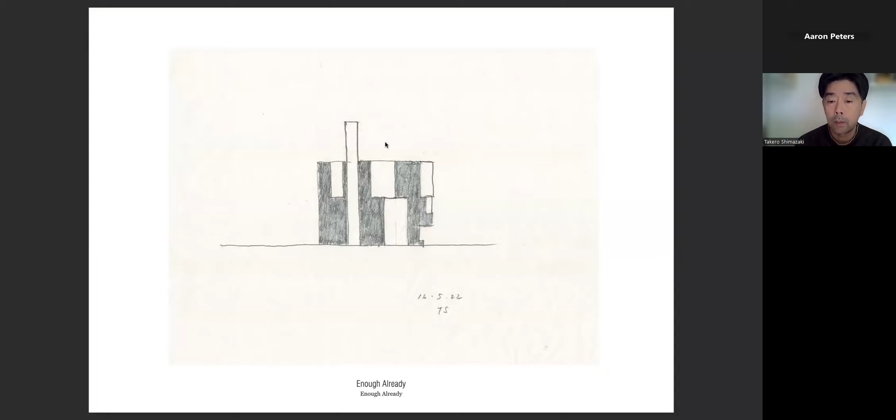It's really about a search for architecture in the times that we live in. We've gone through a very varying, ever-changing economical and political background since 1996 when we started our practice. I remember the harsh experience of the Lehman shock in 2008, and rapid climate change since. With all this background, I think we're really focused on what kind of architecture we can do working with existing things as much as possible.

So I've framed this talk. First I'll go through the topics that I think about as intro. These are based on brief titles for my diploma students at London Met, where I've been teaching since 2016. These are the topics that we've dealt with over the last 10 years or so with my students, and I thought I would frame our own work at TSA under these headings.

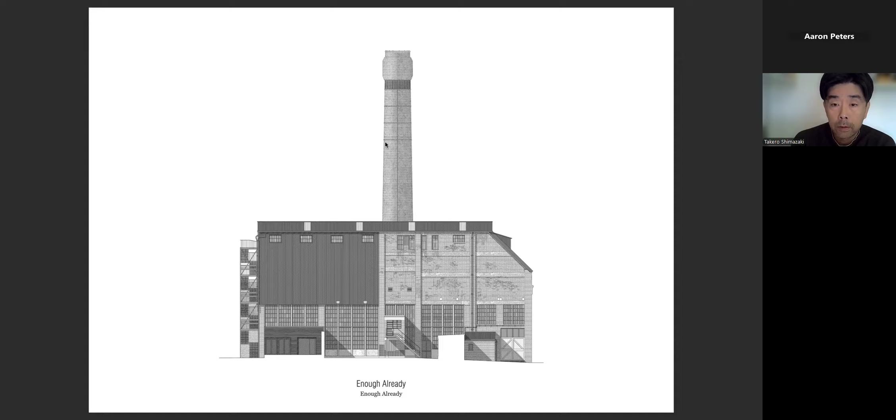So, 'Enough Already' really is about observation. It's about talking about observing as already a design process or design development, by looking very carefully at things that you already have. You're kind of designing half of the project already. The other thing is that with the title 'Enough Already,' it's not to say that I'm angry or fed up. It's more that we do have enough building stock and things that we can already work with. It's kind of saying that the glass is half full.

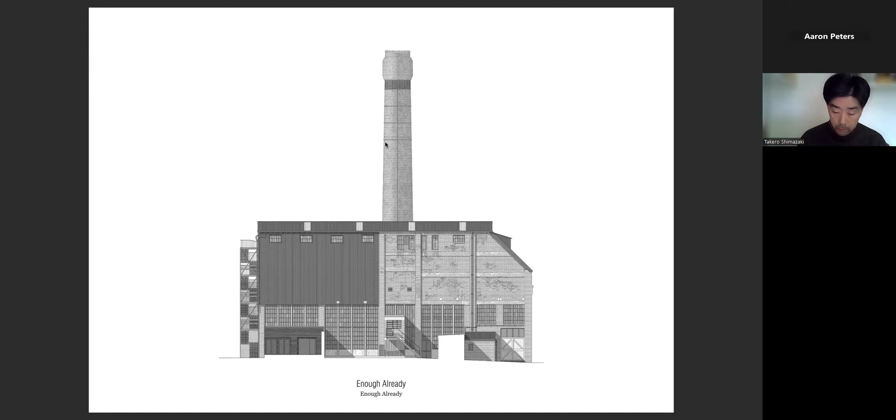I like to believe that we live in a world of abundance. We've worked, like many practices since 1996, on small projects, refurbishments, extensions, and this has already always been like that. We've always worked with existing things—it's not just a recent thing.

So these are topics that we've been thinking about, and I'll discuss them in more detail. But 'formal correction' was something that came from a brief that we set up in 2016 with my core tutor at the time, Summer Islam of Material Cultures. We began by looking at Palladio—I wanted to go back in history and look at what these architects were doing. We focused on the idea that this Basilica Palladiana was, in essence, a reuse.

It's a project where Palladio made this new loggia around the former Gothic building. You can see in these diagrams that the new loggia, in the perimeter, the column rhythm actually works ever so slightly to adapt to the unevenness of the existing situation.

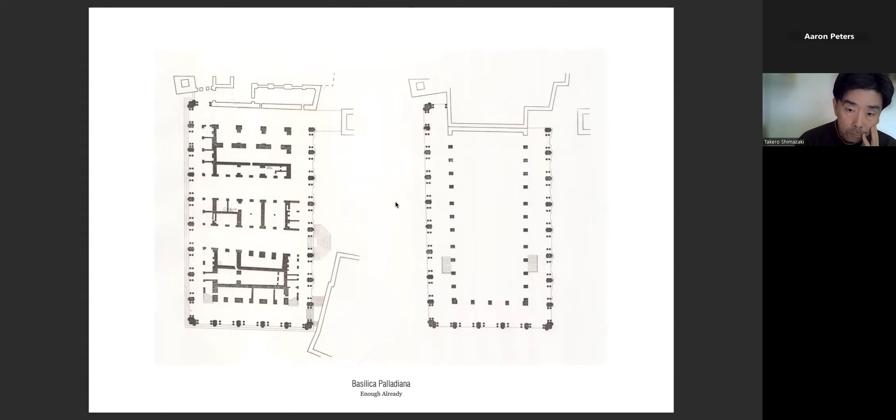You can see that this original building is slightly not perfectly symmetrical nor proportioned, and Palladio has this amazing skill to adjust that—to actually formally correct it—so that the end product has more of an order. We found that very, very interesting as a process.

We asked our students to look at Palladio's idealized plans and drawings from his Quattro Libri book. Then we went to Vicenza and surveyed the buildings that were actually built, and overlapped those two drawings just to see what changes occurred from the idealized diagrams and drawings to the reality. We found a really interesting idea in practice as well.

This is a project I won't talk about today, but it's an ordinary suburban house in Surrey that we, shall we say, formally corrected by adding this loggia when the client asked us to extend into the garden. These are the sort of discrepancies that occur with the existing openings and the new opening, which was something very interesting for me.

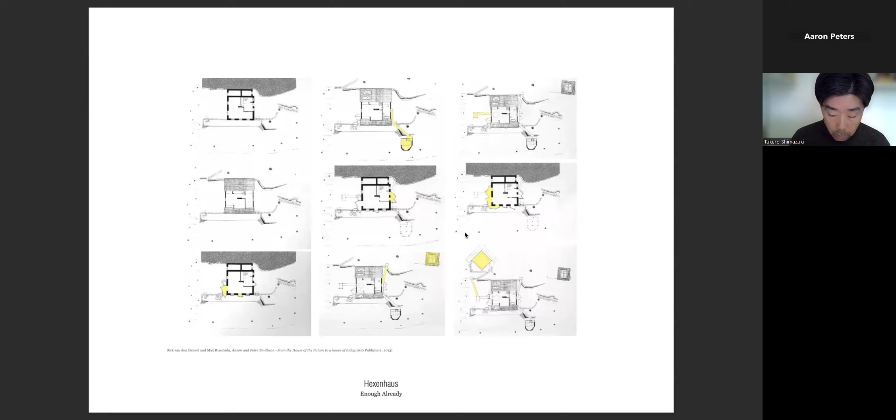When I started teaching at London Met, I was surrounded by some amazing architects like Peter St. John, Tony Fretton, and I often noticed that they referred to other buildings and other precedents.

For me, this idea of translation really began from my time at Alison and Peter Smithson's office, round about 2000. After I set up my own practice, I had an opportunity to work for Peter two days a week, helping him with a project called Hexenhaus, one of the Smithson's last projects, where they developed this ordinary house in Germany and added a porch, a bridge, a wine drinking room, etc. These extended porches spanned about 25 years. I don't think the project's still finished, but this idea of renewing with the client over a long period of time was a very big influence on our practice.

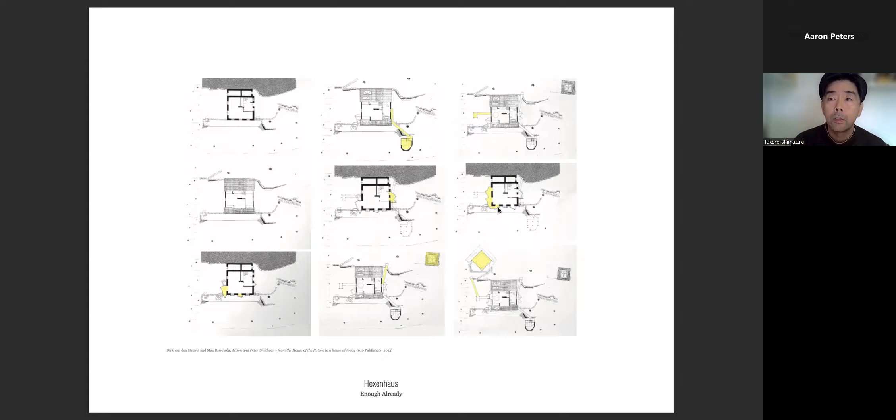That you can do quite little, but accumulate ideas over years. At a more personal level—this is the client's business card—the way the client at Hexenhaus worked has influenced what we do in the practice daily, and influenced things like our Christmas cards. This is a card received from Axel with Smithson's drawing of Hexenhaus, the business card, and both Smithson's and Axel's cats appearing in the cards.

So, Enough Already. I'm interested in the idea of abundance and the fact that we already have a lot of existing richness. We ask students every year to start with surveys, and we draw the existing through observation drawings. We really look at what's there already. That moment in time is very important.

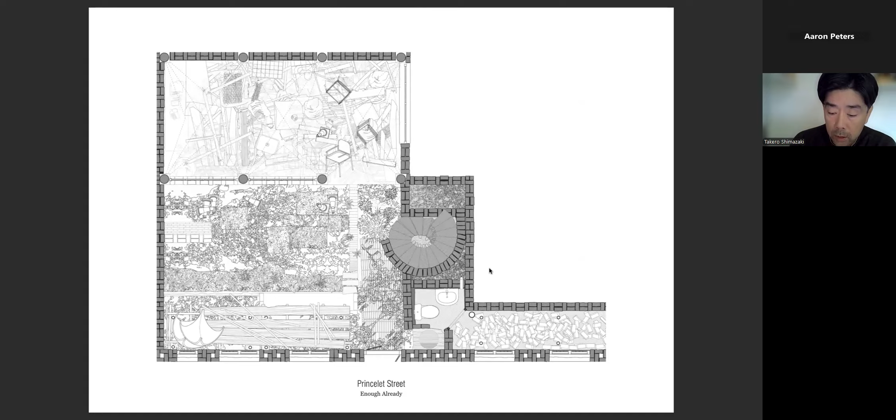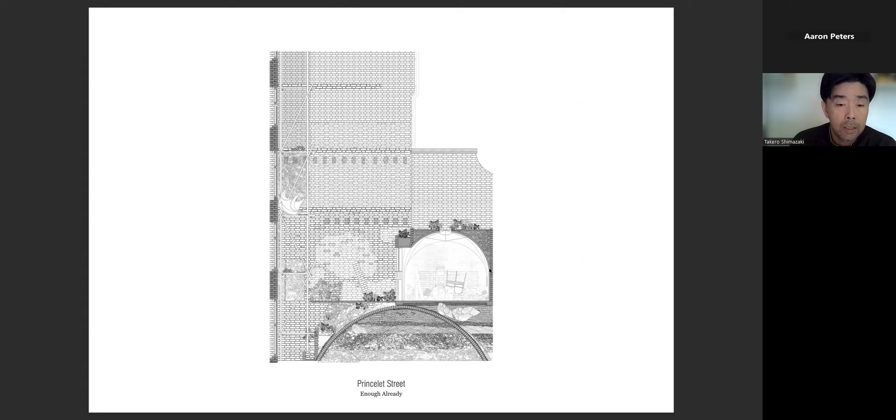Lina Bo Bardi called it the historical present. Everything that exists in front of you, whether it's historical or contemporary, I think it's all the same—it exists presently. So we take that seriously and we record what's present in front of us. We think that everything is, in a way, from the same era.

This was an exhibition that we did that year with my diploma unit in the Truman's Brewery area, Brick Lane, with Assemble, showcasing students' work.

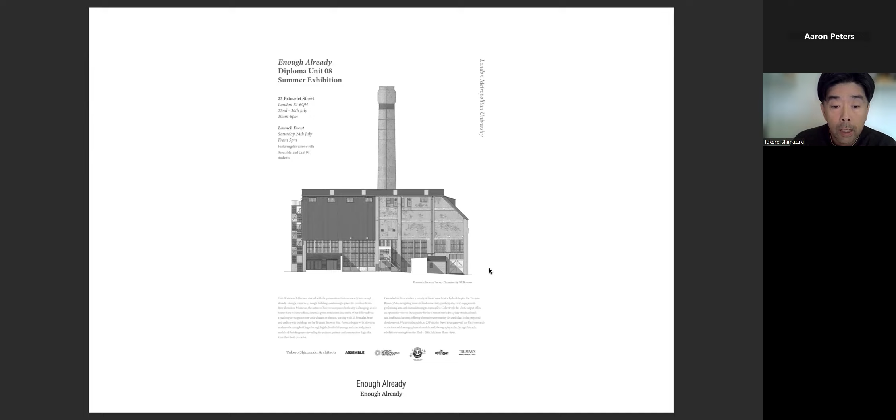This is another year, but I did some writing about students' model making for Stoa magazine from Naples. This was work by the students recording every aspect of fragments of existing buildings in Stoke-on-Trent.

This notion of making existing things through models became a habit in our unit. This is Ollie Brenner in the year of Enough Already, making this existing model on the left, and how it became part of his proposal. But this is already, to me, architecture—the making of the existing is already a proposal.

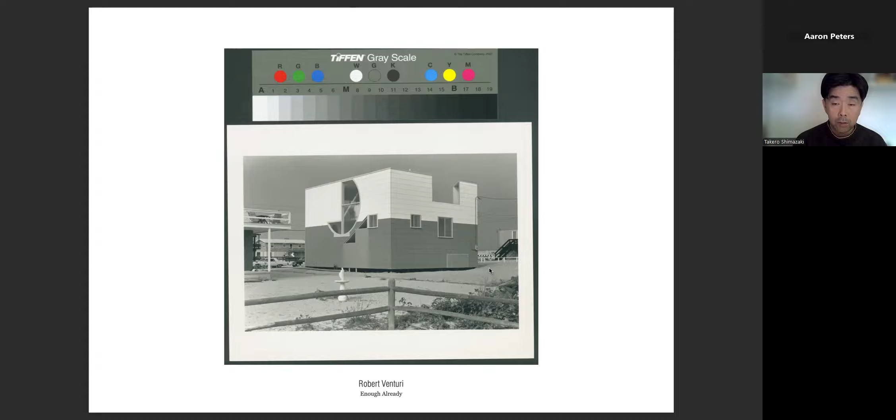Lightness and weight is another important topic for us, and we studied it through Robert Venturi's book, Complexity and Contradiction, looking at this idea of how you can make something quite weighty out of light materials. So our interest was about this kind of materiality.

Again, when we went to visit Palladio's work, we noticed this kind of timber construction appearing through decay, and this aim of making something quite light appear quite heavy with stucco render to look like stone—that was already at play in Palladio's time.

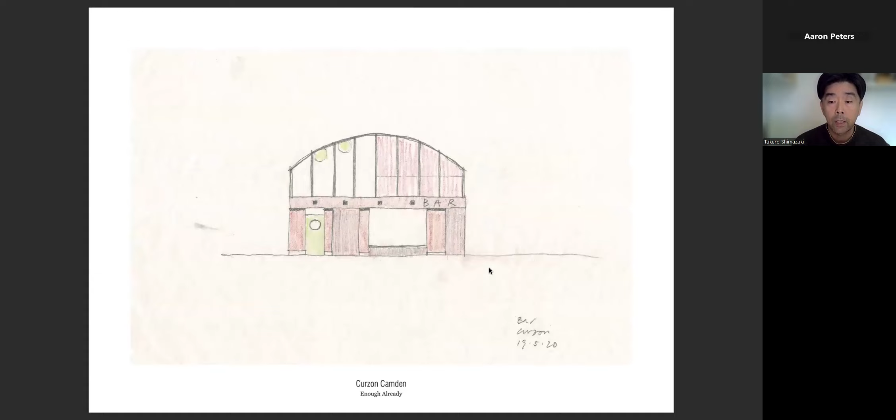I very much enjoyed this idea when thinking about our own projects, often with a very tight budget. I'll show you later, but this is about that notion in our Curzon Camden project, which is essentially just render and lightweight steel construction.

Yohaku and Ma was another brief, really about the space between. It's about this idea that in times of scarcity, lack of resource, low budget projects—where can we make architecture? I think architecture can exist in how we space things, how we make distances between things. Those things can create tension and, in a way, beauty.

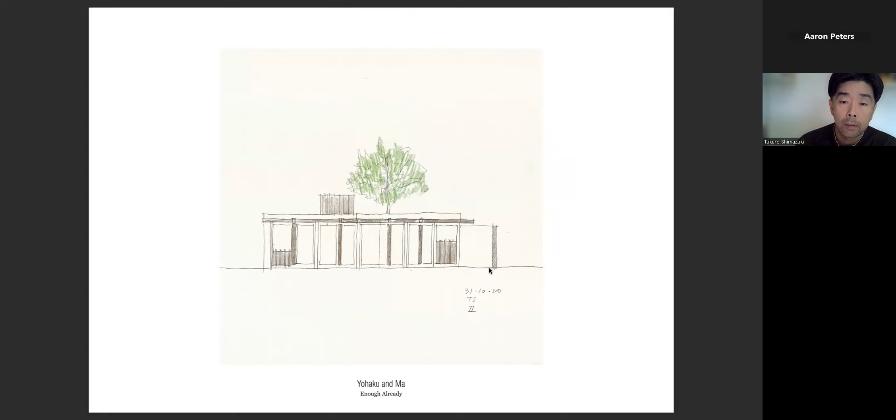This comes from the idea of Ma in Japanese traditional architecture—that a lot of Japanese architecture comes from this idea of spacing and distancing of columns, and tatami mats as living spaces. These ideas were utilized in Niwa House, which I'll show you later, but the idea that column spacing and user plan layout spacing became very key.

We architects talk about tolerance all the time, about when materials come to meet, but maybe there's not much discussion about how architects can be tolerant to existing situations and work with existing things. Working with existing things means you have to be really tolerant, you have to really work with what's already there, change your stance, and be really accommodating.

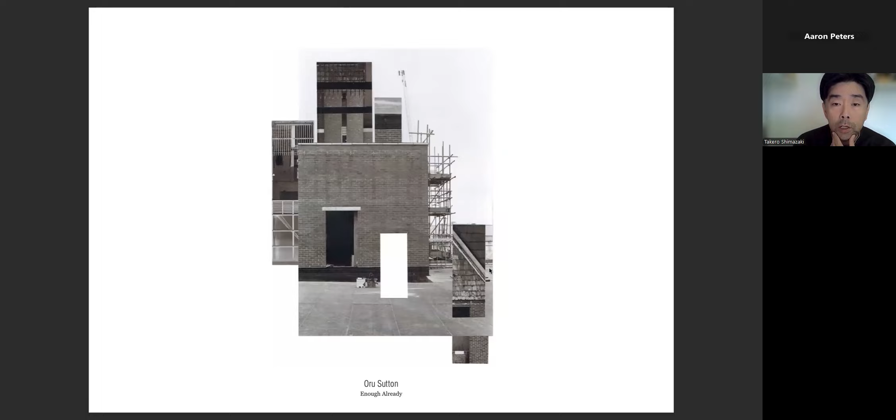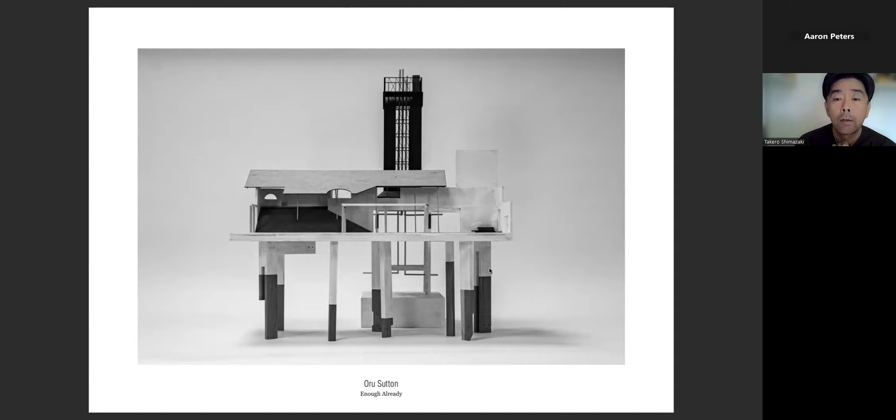So these are some students' work on collaging, trying to see solutions in the existing, working with materials as found, and from skip, in a way. This is a project by Ryan Spear in our unit, working with as-found materials to make this model for a community center in Sutton.

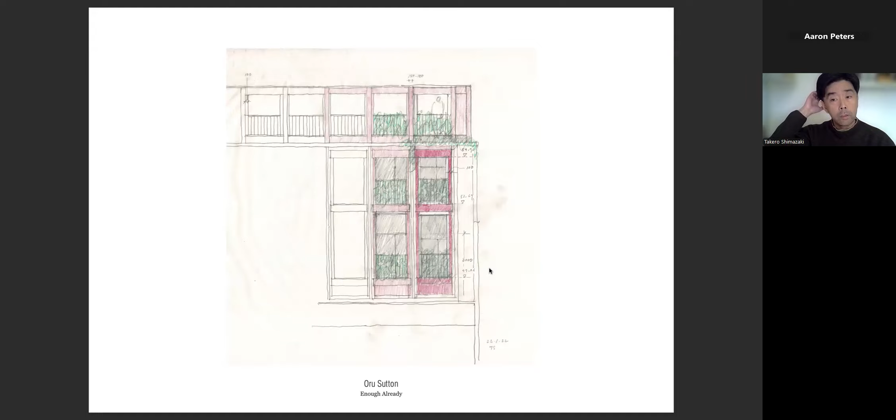And I kind of work like that all the time, where these insertions of a new facade onto an existing facade are really about this struggle about tolerance.

Finally, we're working this year with my group of students on this notion of what goes up, what is permanent, what is impermanent. We're asking our students: nothing is really permanent, everything is impermanent. But if we start from that notion, how do you think about architecture? How do you think about what you build, about the reuse of your own work 50 or 100 years later? What makes that change the way you think about maintenance?

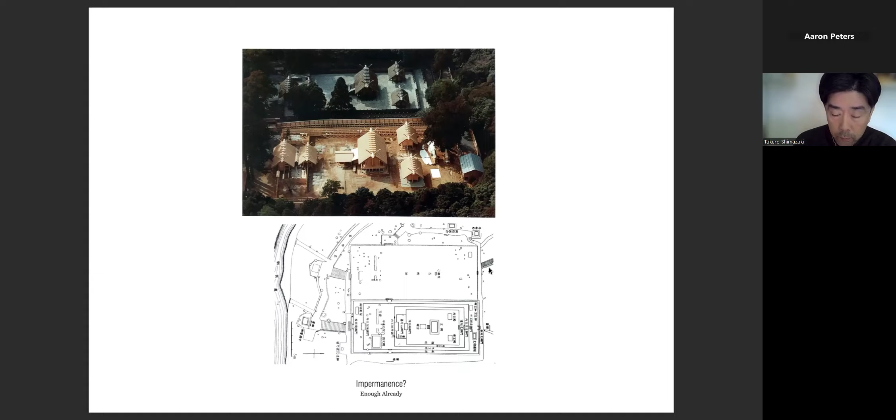We're giving them examples of what was perceived as permanence, or different ways of permanence. The Ise Shrine in Japan is thought of as permanent in a different notion, maintained by rebuilding every 20 years. But is that really sustainable? The shrine is obviously very special, with surrounding forestry, etc. Those are questions we're asking our students, and I think we think about that quite seriously in our practice too.

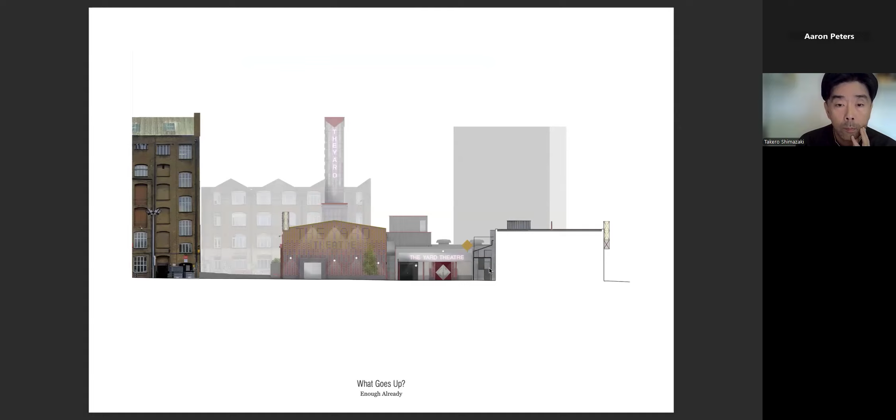I won't try to explain or describe the projects in the time we have, but I wanted to show, almost like slides, those notions I just talked about in my introduction, how they may have materialized or been discussed in these six projects. Five are reuse projects, one is a new project, but I'd categorize them all as working with existing things.

So Leicester Print Workshop is a project from 2016. The Leicester Print Workshop art facilities inherited this glass warehouse in the middle of the arts quarter from the council. We started by working with this existing building and asking what can we do with it. The budget was only 450,000 pounds, so a very, very tight budget.

It became about how do we really maximize these existing features and character. By stripping a little bit, we started to get deeper into the character of the existing, which we thought was really fundamental to the future of this building.

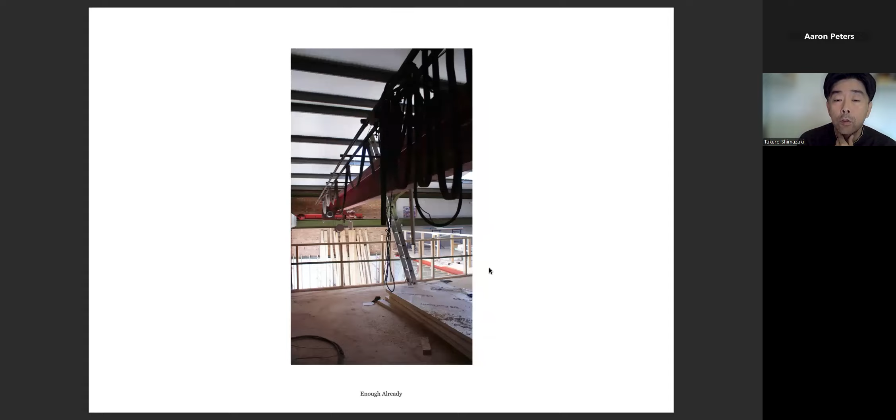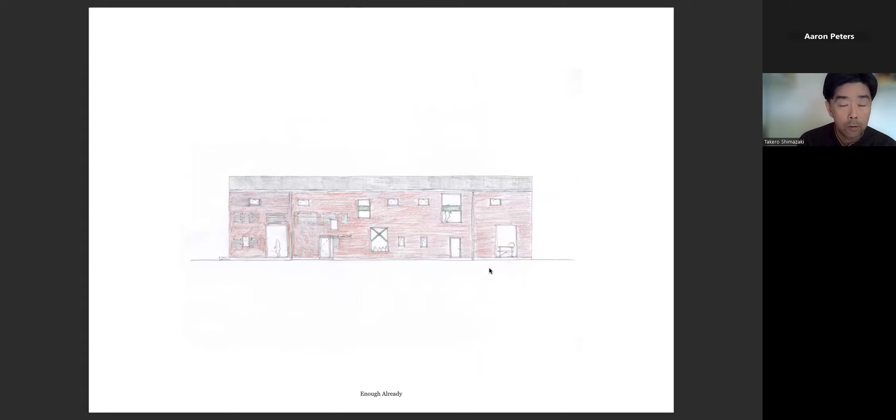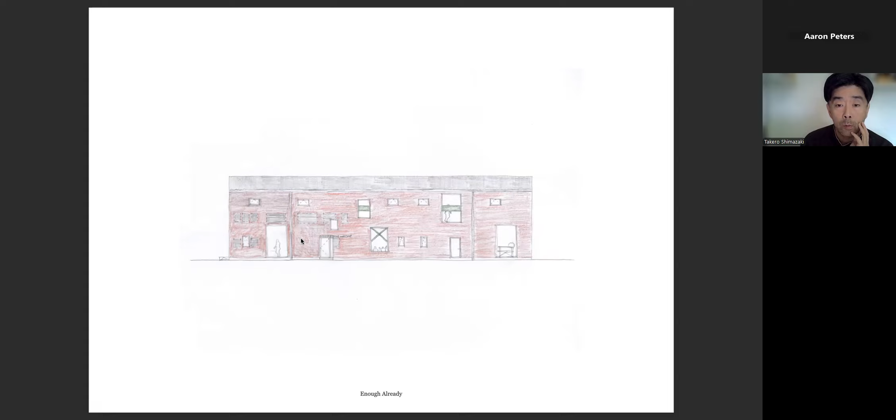We decided that everything we add would be just white, so you're able to really have these glimpses of the existing from the cityscape as well. We brought in a new order, a new playfulness to the facade, reusing the brickwork to close off some of the openings from the existing. So if we make an opening, we use the same brick to close off some of the openings, and so on.

These are sketches from early on, which we developed into the final scheme. And the plans are very simple.

You can see all these partitions are new, dividing the co-working studio space from the back-of-house dark rooms, washrooms, etc., with the educational facility in the middle, and a small gallery space to the front of house. This is a really admirable institution.

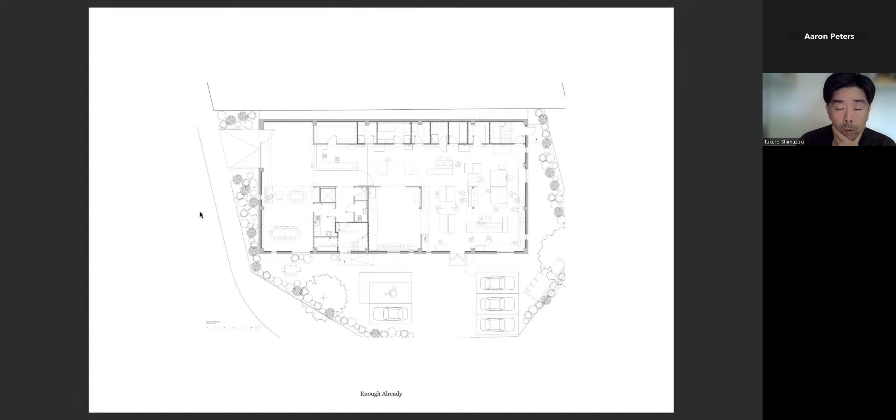It's really looked after by the artists themselves, and we were really fortunate to work with them. The client body included Soraya Smithson, who was a member of the board — the daughter of architects Alison and Peter.

So we really enjoyed the project, creating this almost like a reused new body in the city, in this quarter of former warehouses. We quite enjoy the fact that it's acknowledging the context, but it's clearly slightly different. And we enjoyed that juxtaposition, but it is really a very frugal, humble project of reuse with limited budget.

What we really enjoyed is how the artists keep on developing the site. The garden is now fully developed outside by them, and they added a bookstore inside, etc. This is a gallery space. Once the artists started to occupy it, the space has really become alive.

And this kind of relationship with existing surroundings and the spaces inside - really how the former warehouse is always visible and always present, cutting through these partition spaces, with the former beams and structural cranes, etc. So you kind of really live with the historical present.

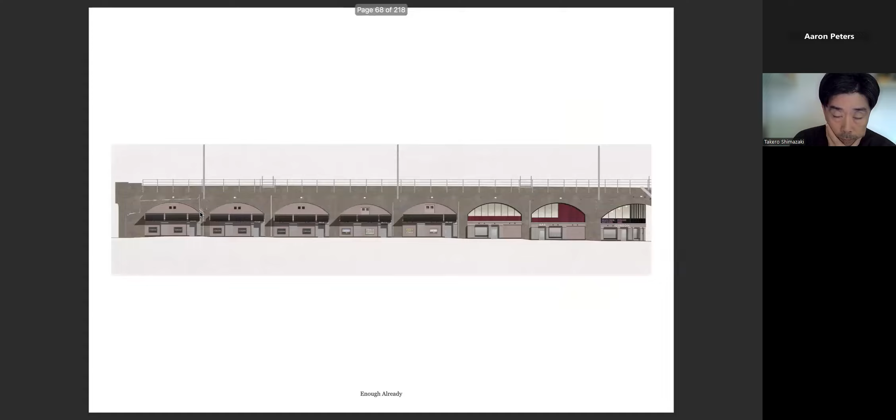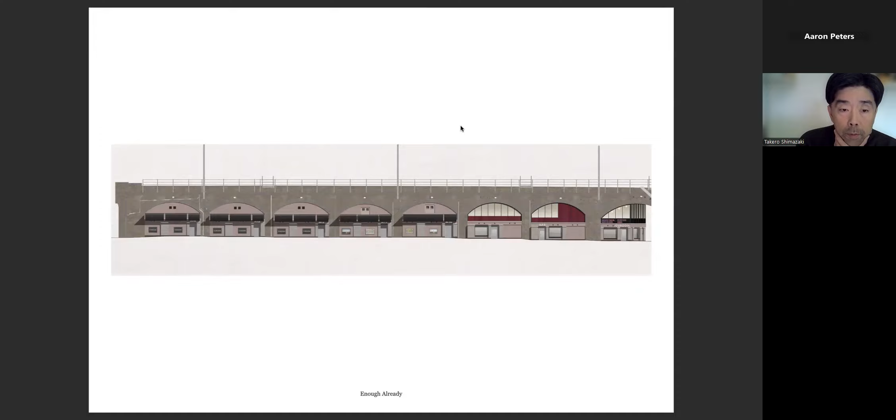Curzon Camden is another project which is about working underneath the existing railway viaduct. The developers had already started this development, so a lot of the glazing and curtain walling was part of the existing structure. We worked with the master plan by the developer architects, but then remodeled all the other infills. It's essentially a new cinema for Curzon Cinema with five very small, intimate screens, a bar space, and a little coffee shop.

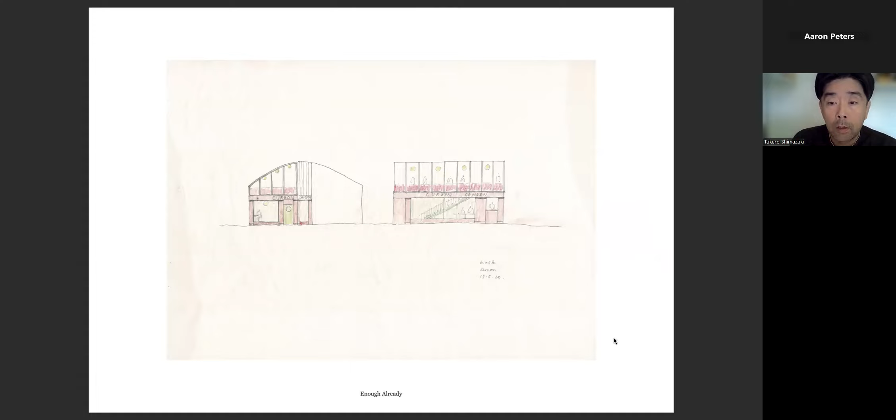We enjoyed thinking about what kind of architectural ideas are possible with, again, quite a limited budget with a light touch. So this idea of lightness and weight became fundamental in our approach.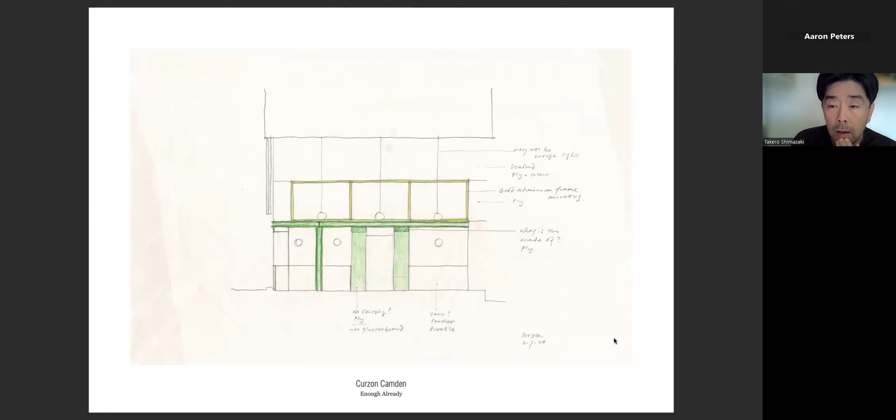I won't go into too much detail, but the green is what we've added, and we worked with the existing black background. We utilize as much as possible existing elements, even the new insertions by the developer, to really think about what kind of atmosphere we can recreate.

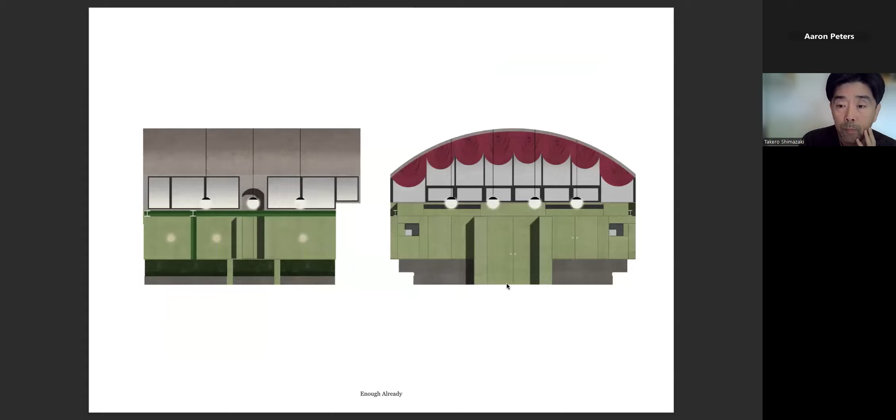So everything is like a mix of render. These vertical columns are just render columns, not even touching the ground. And this is just really reusing the existing curtain walling that the developer left there.

So it's really looking at opportunities for architectural interventions, I suppose, in every little square inch, maximizing these existing things into a new language.

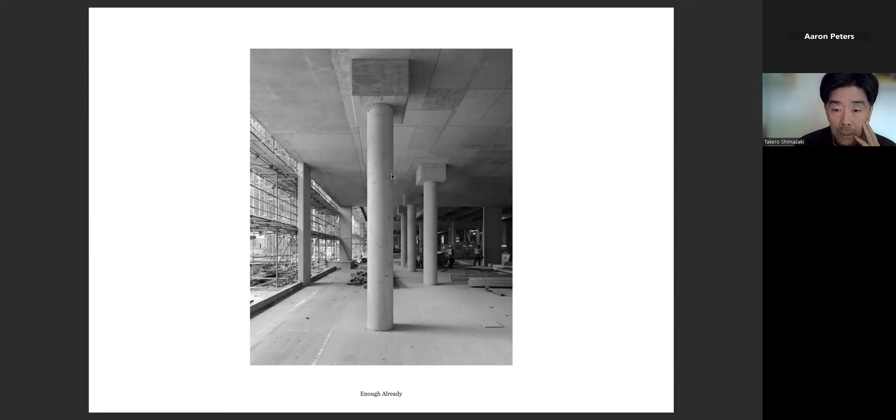And we had to work with as-found conditions in this new development - in the sense that we had to work with what the developers were proposing for the housing units above, and these are the structures holding that up to create this new dance school, ballet school.

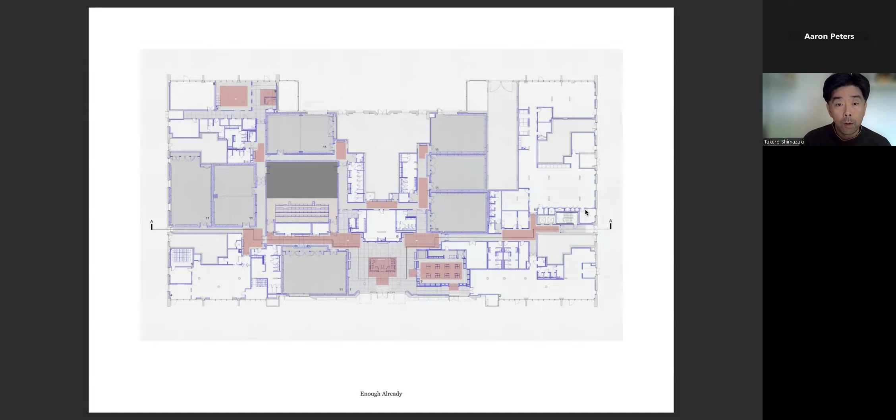This is the entrance, and then we have seven dance studios, one big performance space, library space, cafe space, shop space, office, lecture rooms, etc. So it's a big city kind of inside a new developed city.

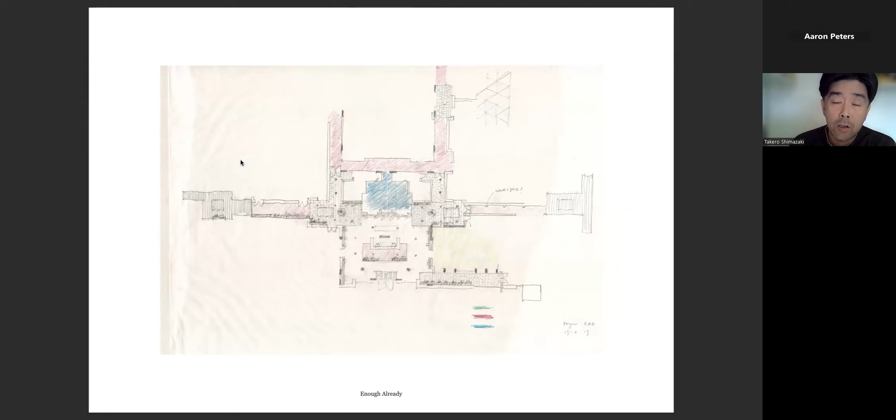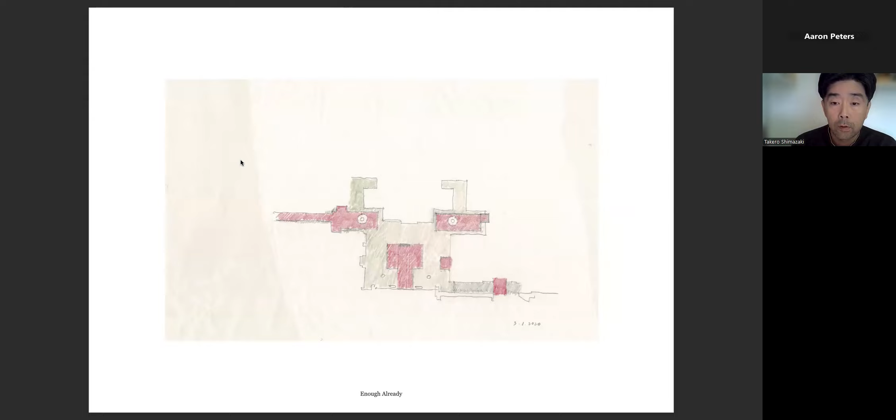I was very much interested in this idea of streets and plaza to make some kind of notion of a cityscape inside this essentially interiorized, very deep plan. We created this notion of a space for pausing, a space to meet and interact.

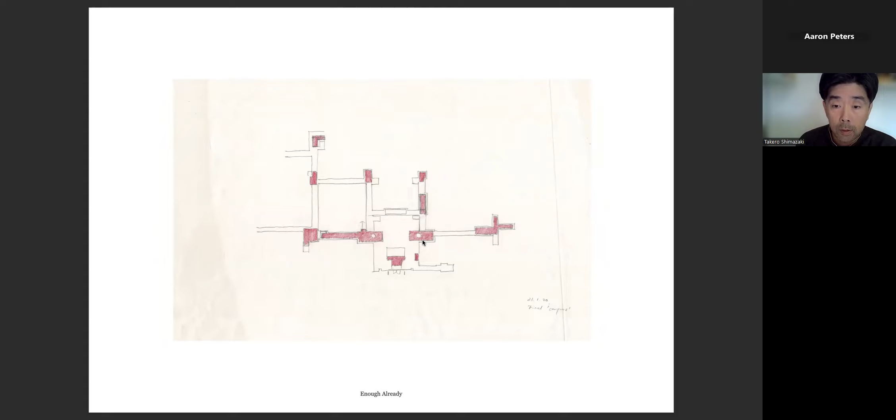The developer plan that we inherited was literally rooms of corridors. We wanted to move away from that by expanding and shrinking some of these streets, making more sense of these nodes, spaces for students and teachers to meet.

We looked at places like the Barcelona Gothic quarter, where you go through these meandering streets and pop out into city squares. So it was about how do we bring some architecture into this very corporate developer housing scheme and site.

We kept most of the columns as found, and used them as the main key features that we worked around to form spaces. The column became a node, a center point for these kinds of plazas to occur.

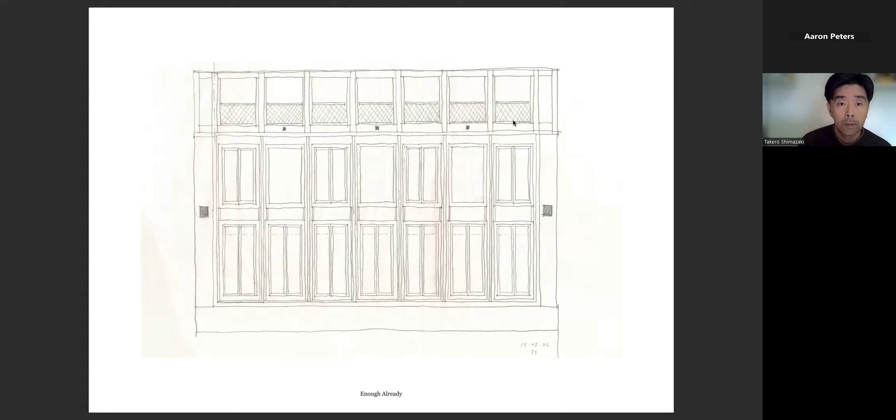On that front facade you saw, we kept all the existing pillars and frames, but thought about adding to the rooftop, re-emphasizing the verticality of the space and bringing more light into the frontage.

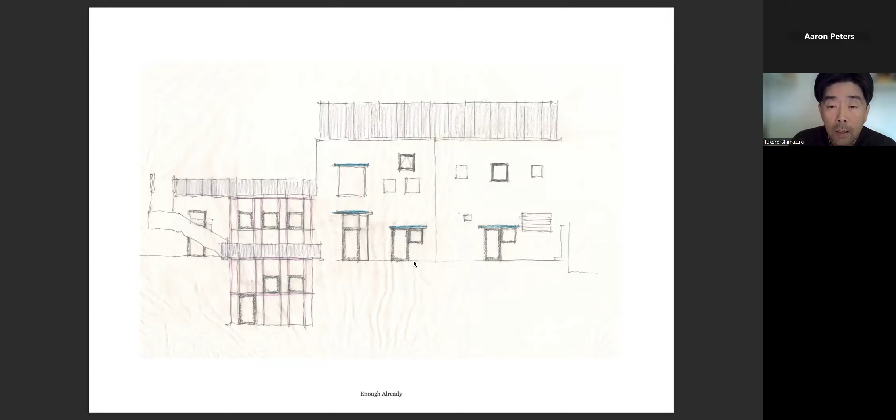In the rear, in the deeper plan, we thought about how to insert new architectural language, and how to tie these new additions into this very, very large plot. I'll show you in the plans shortly—it's really about being tolerant, working with existing conditions, and trying to bring our own language into the setting.

You can see the plan of the high street is at this end, and this is the back trolley way, but it's a very, very deep plan. All the red lines are what we've added.

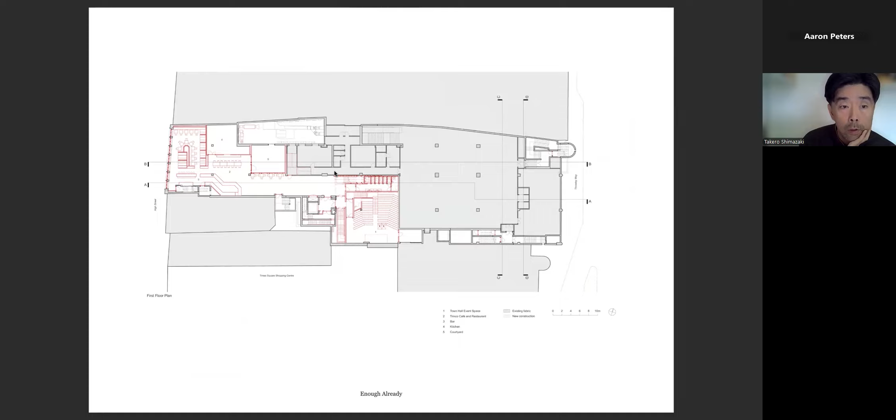This is the BHS logo coming in from the shopping center, which acted as our entrance. Then you go up these big stairs, and we created a new town hall auditorium, new restaurant, and made a cut into the existing warehouse to connect the different floors up to the third floor, where there's a garden, a nursery space, and a big co-working space.

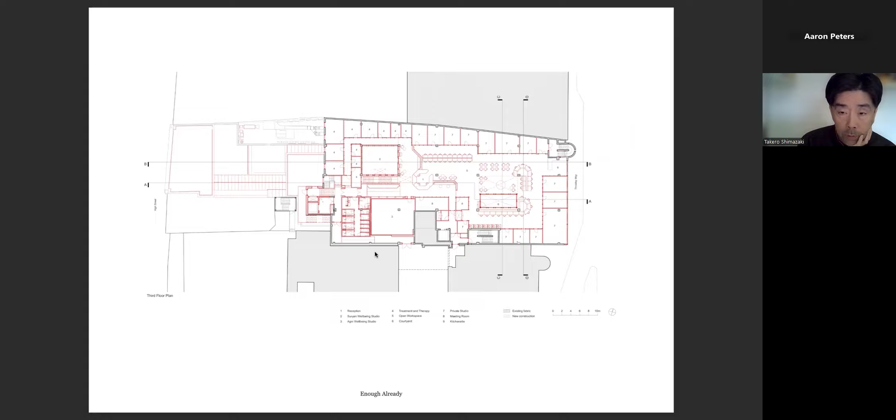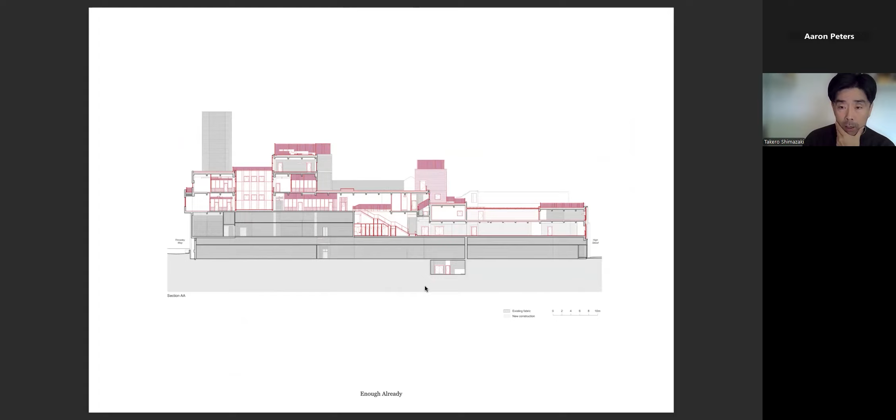And then the fourth floor co-working space, and then the rooftop landscape. It's very hard to explain, but you can see in the section here, it's like creating a new city inside this warehouse, with what you saw at the beginning, that kind of high street facade being very just a fragment of what's behind.

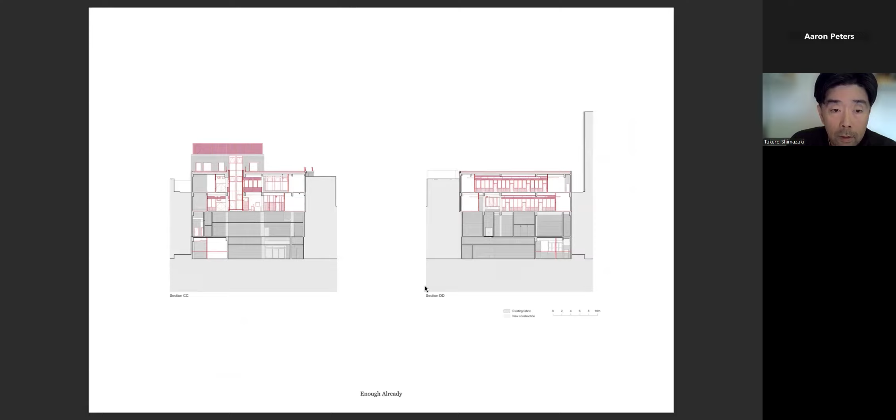So it's this very large, almost like a landscape, behind the facade. We really enjoyed inserting this kind of new narrative of rhythm and proportion, to create this new community center in Sutton, which is a sort of - Sutton High Street is fairly inactive compared to other high streets, but it's really changing the place, and it's very popular. You see people hanging around in these spaces.

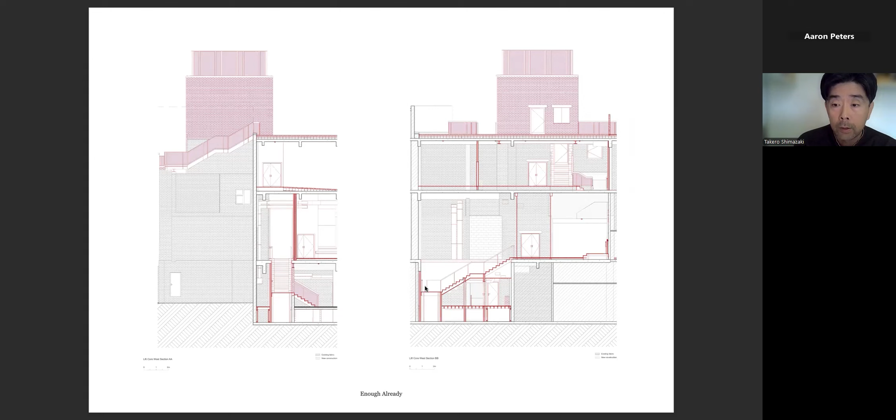And you can see in these cross sections as well what we've inserted against what's existing. We try to do as little as possible with this notion of enough already, maximizing the existing. What we've inserted, we wanted to form a sort of language that formalized as a backdrop. So here you can see the insertion of an atrium into an existing structure that we opened up, or we've reused every brickwork that we were taking away that was reusable to create a new reception desk.

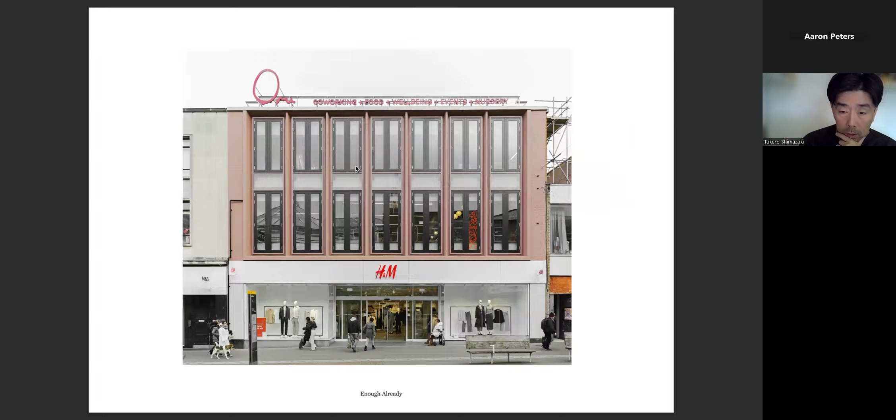And then this is the new facade, that sort of has these kind of vertical openings. We just exposed this slab that was in between floor space, and then maximized these kind of heights through these new windows, left H&M as it was. And then internally, you see these kind of new insertions into the existing structure.

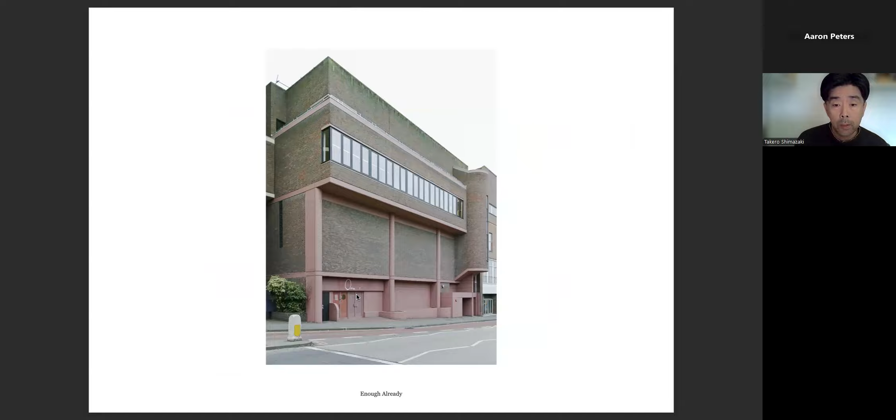Just two more projects. Niwa House is a project that we finished in 2024. It's a new house project, but again, we start always from existing. This is for a wheelchair user, so a fully accessible horizontal site that they were looking for a plot to build a new house in.

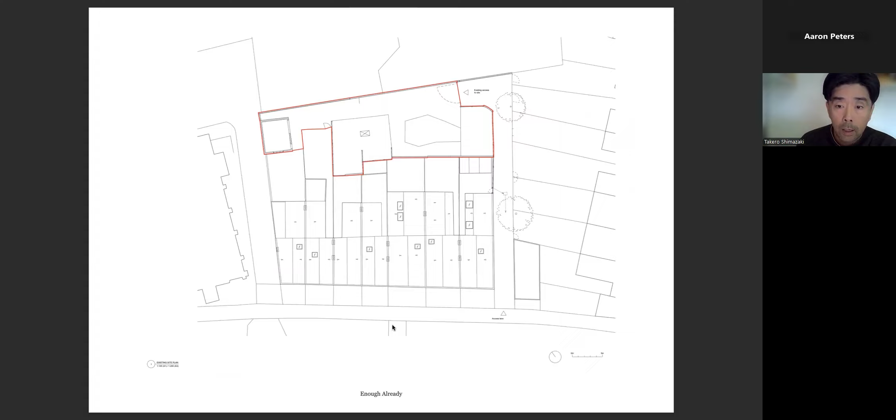We visited the existing site with our clients just at the start of COVID, and really enjoyed observing and looking at the site. This is the plot in the rear of this back of the seven terrace houses.

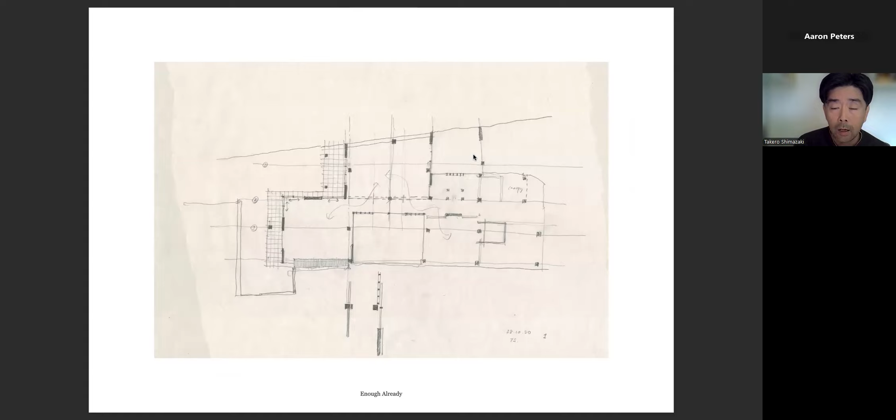We started by drawing the existing quite carefully. As you can see, this is the sketch of the house, a horizontal house, with this kind of fully connected spaces with courtyards. And then setting up this kind of lightweight pavilion, basically. How can we do as little as possible on this site, by inserting a light structure, almost like traditional Japanese architecture - the client is half Japanese.

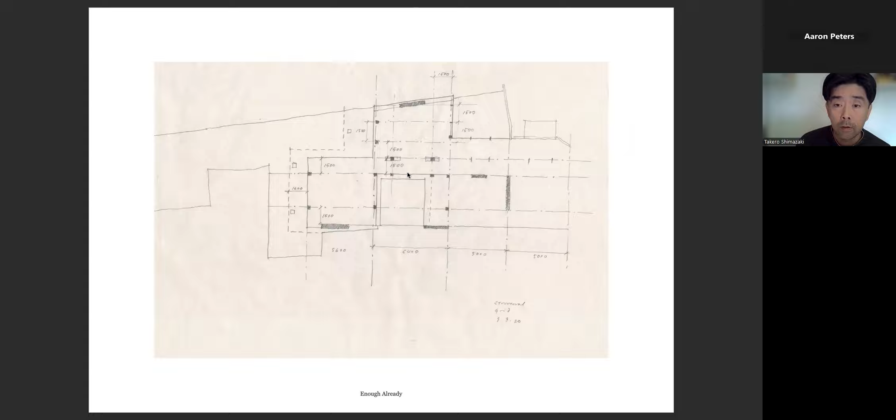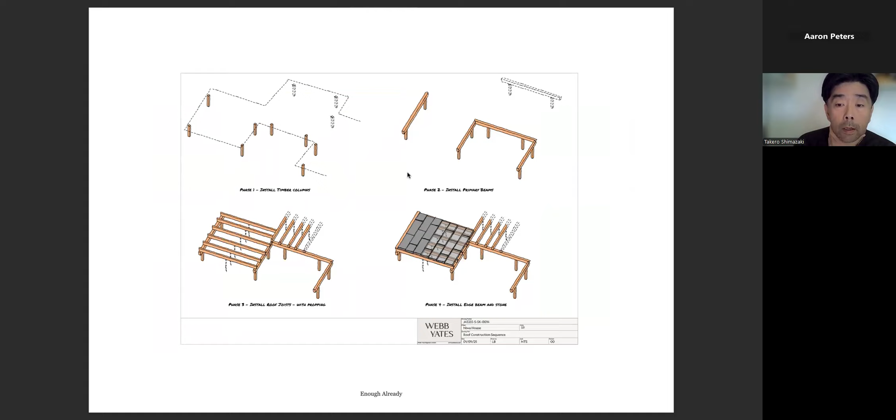And we were very conscious about global warming and how to keep thermal mass so that it's very cool in the summer with natural ventilation, and then warm in the winter. So no air conditioning, apart from in this kind of gym space in the lower ground.

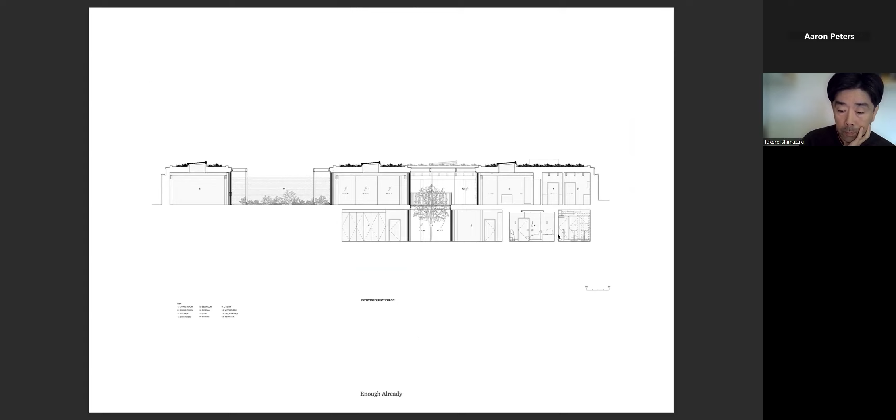We were really focusing on creating this Engawa-like space, an inside-outside space, with various translations from Sverre Fehn to Ryue Nishizawa of SANAA, and Mies, of course, to create this kind of pavilion-like structure.

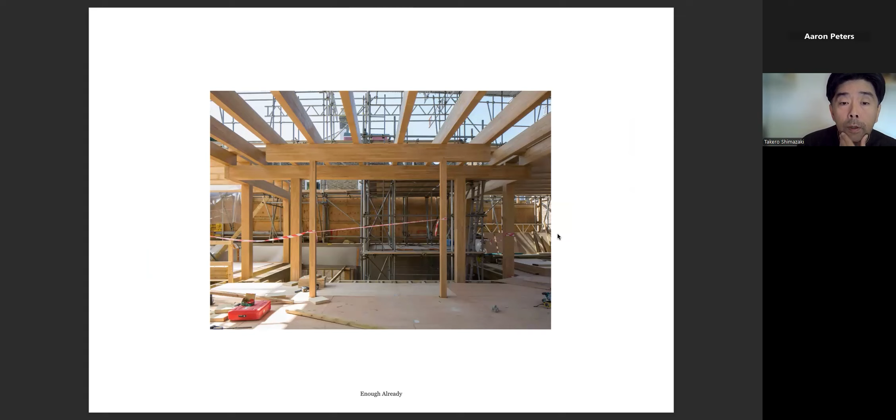This is during the site process. We really enjoy this lightweight frame going up to create this building of lightness and heaviness.

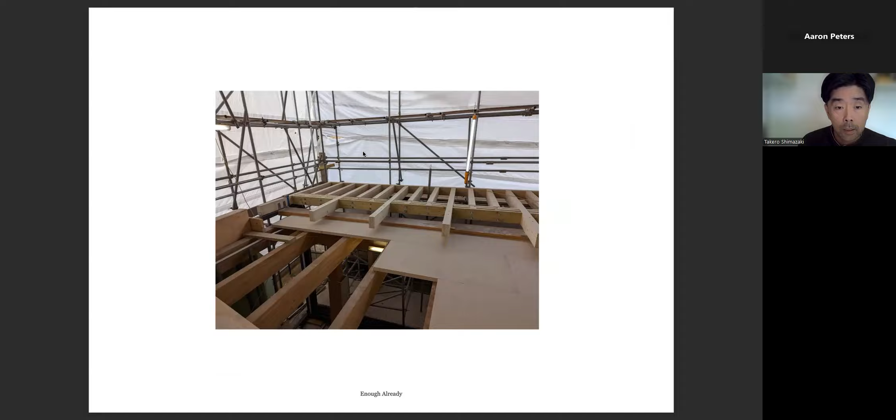These are photographs by Felix Koch from 6A Architects, making incredible atmospheric photos of the site process. This is the stone tiles going in, modular at 750, creating this 1.5 meter grid, which acts as a thermal buffer, but it's literally resting on top of the glulam beams, sandwiched by a perimeter of glulam beams to hold it in place and form this decking, which supports the grass roof, the green roof on top.

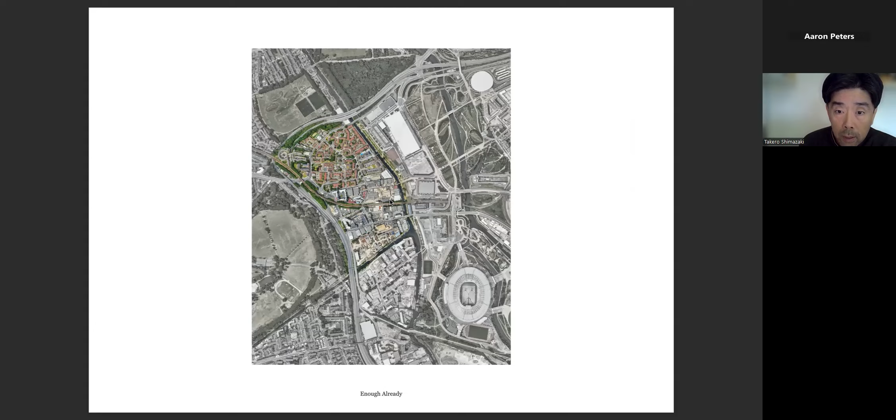The Yard Theatre is a theatre that was built for £9,000 about 13 years ago, and it's been operating in Hackney Wick, near the Olympic Park and the new V&A, etc. It's just around here by the canal in Hackney Wick.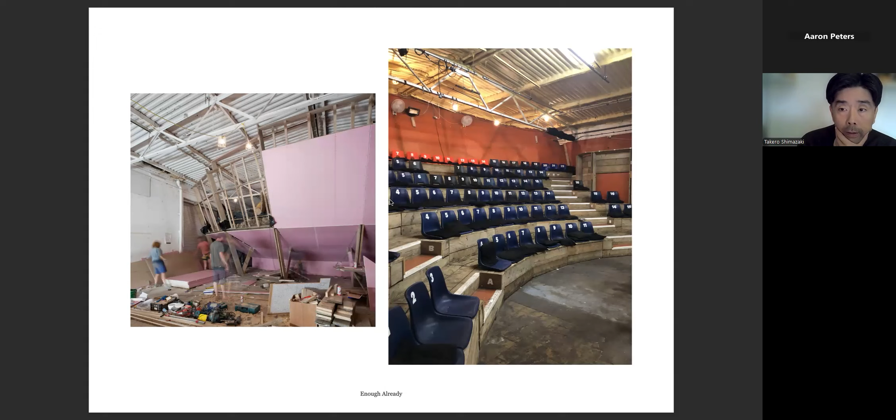It's really an admirable project where the artistic director and practice developed self-build architecture that has lasted all of this time.

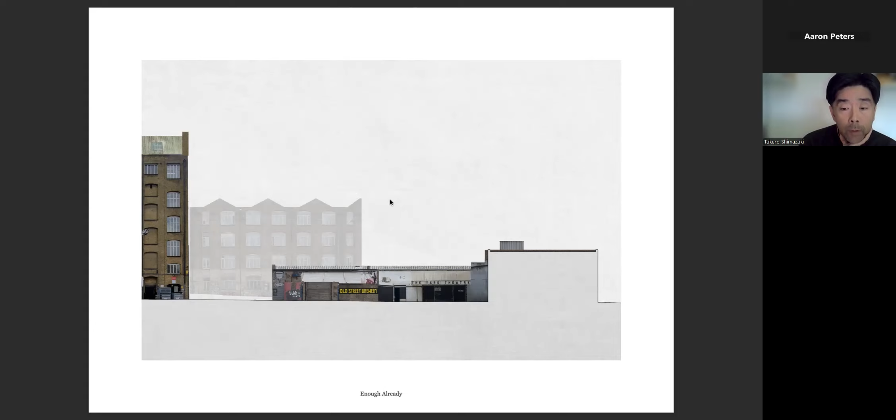Very iconic theatre, with a bar space where the existing theatre was projecting out into the bar space. This project is about building a new wing to this theatre, a new auditorium, retaining as much of the existing as possible.

So we began by really analyzing the existing building and drawing. This is a collage drawing, drawing the existing as carefully as possible, this time in color, explaining the new auditorium being added.

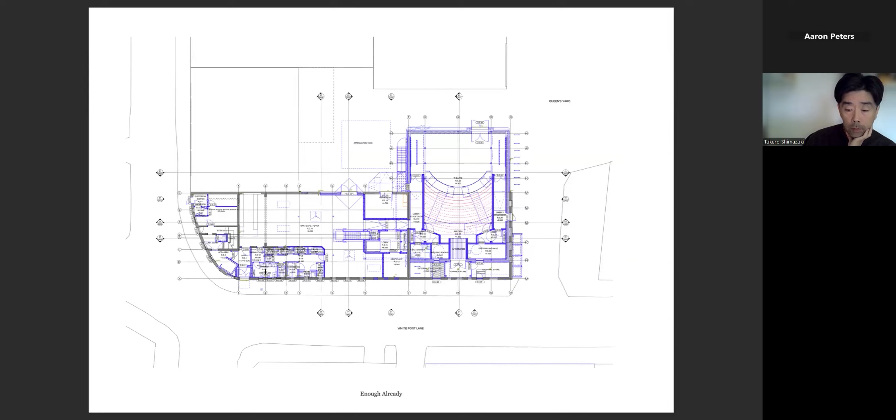The bar is reconfigured, with a new toilet, and there's a first floor as well. I won't explain too much, but it's again about creating this new, almost architectural icon through reuse.

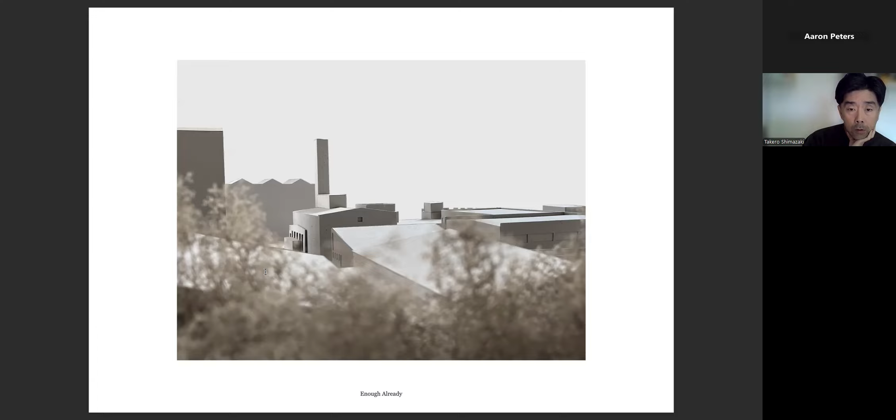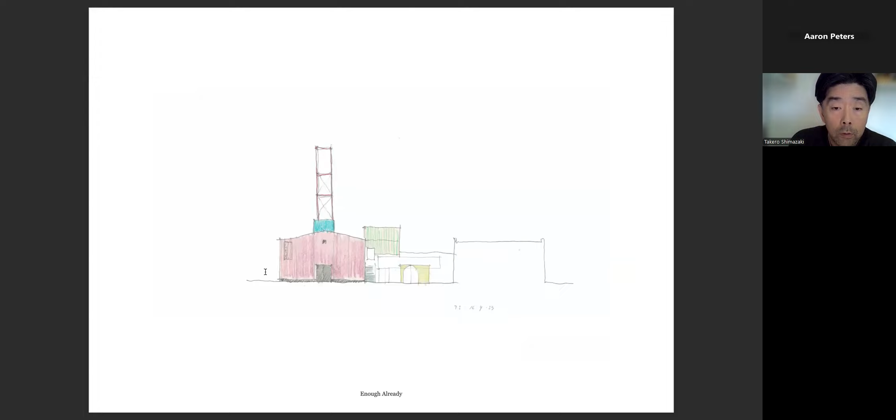This thinking is about what goes up, what mass do we build? These are some of my sketches, really contemplating and discussing with clients through these drawings what is the right thing to do.

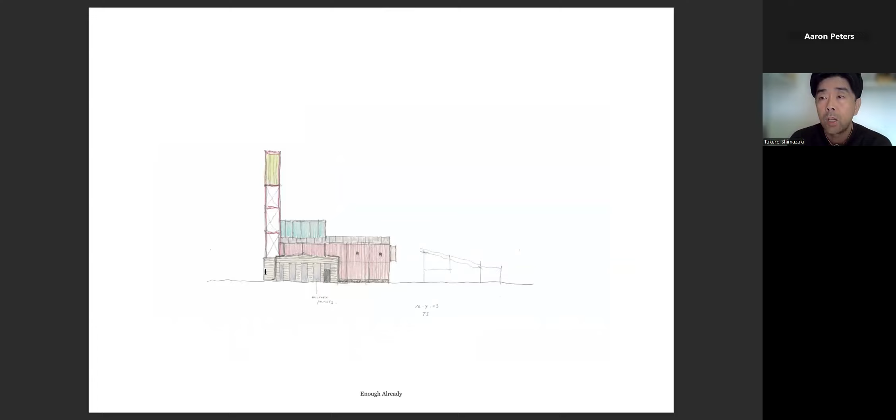The tower, incidentally, is for natural ventilation. The front facade is made of K-Briq, a waste brick made from construction waste from other sites. So the building is essentially simply constructed, but using all of these sustainability methods.

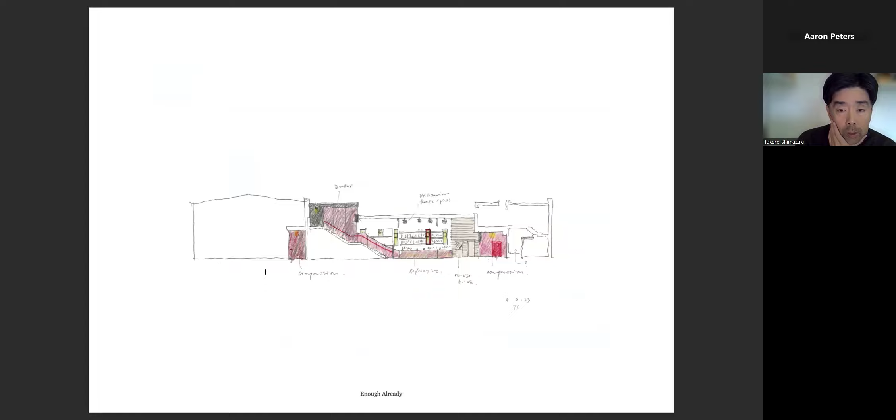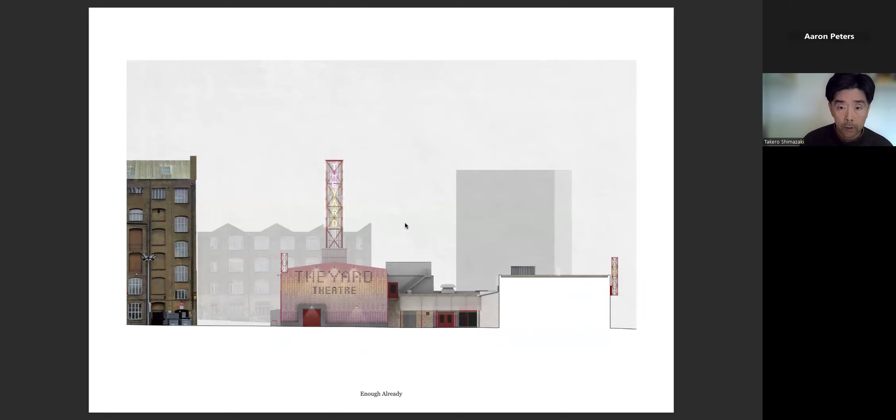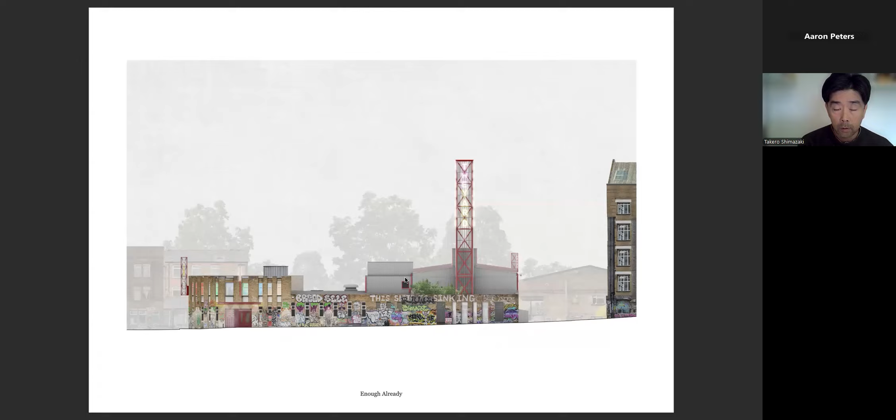These are the planning drawings, and we are on site now. So this is the colorful K-Briq, the waste brick, and this is the natural ventilation tower, which also acts as signage. Natural air is constantly moving through the existing building, and we created this new facade with K-Briq waste brick to form that character facing the open plaza in Queen's Yard, like this. So this becomes a new icon for the area.